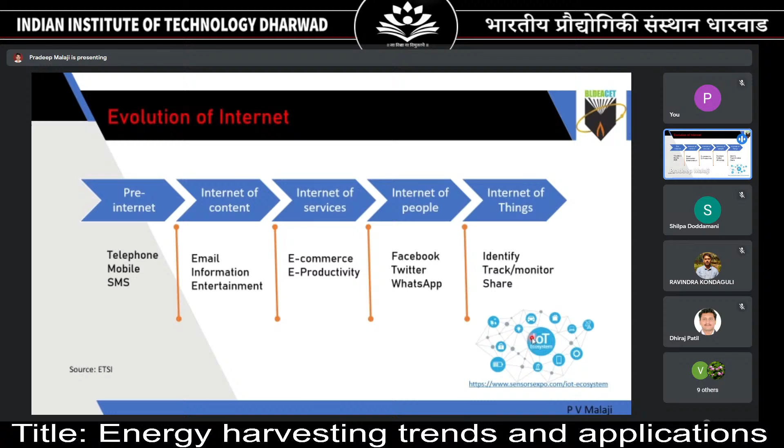What current technological demands are there? Along with Internet of Things, this has made possible smart cities. In smart cities, we want everything to be connected, everything to be controlled in real time, so all the data we want in real time and processing time can be reduced. We even want e-governance, smart energy, smart metering, smart transportation. All these can be made possible by use of Internet of Things.

How does Internet of Things basically work? We connect a lot of things around us using internet, and we can collect this physical world data, process it, then use present AI to take decisions and control the things.

But what is the problem that we are addressing now? We will be needing lakhs of sensors, and these lakhs of sensors need to be powered. With advent of technology, the size of the sensor has been reduced, but it is not so with the case of batteries.

Now we call these wireless sensor networks. They are self-organizing, pervasive, and small in size. The only thing left to be addressed is whether they are self-powered or not. The answer is yes, they are self-powered, but how? They are self-powered by means of battery, but that is not proving to be sustainable.

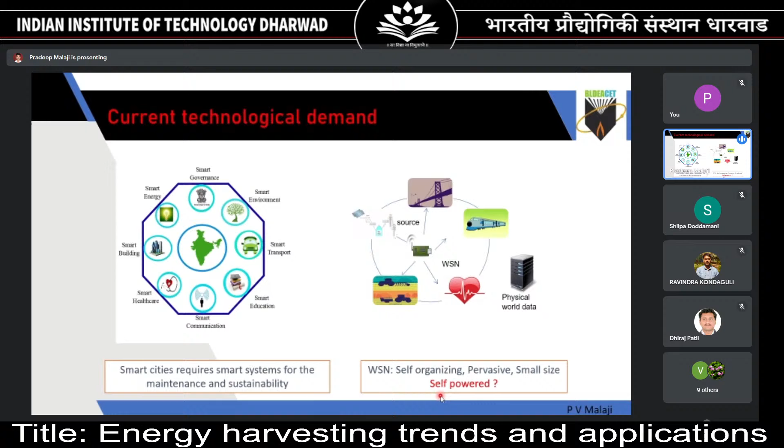So there are different things which need to be addressed, and we'll address one of the solutions. It may be possible in future that we can use, as an alternate to the battery, or to enhance the battery performance and life, this energy harvesting technology.

So this is how energy harvesting technology works. We have a lot of ambient sources surrounding us - it may be mechanical, thermal, solar, or radio frequency. These ambient sources can be converted into useful electrical energy via some generators. We'll be looking at these generators.

What are the different types of generators available? What are their advantages? How to overcome their limitations? Then comes energy storage, which is a major electrical challenge. We'll not be focusing on that, but it is a major challenge that should be integrated if you want to come out with a complete product.

Once stored, the energy can either be used for electronic devices or used to charge up the battery. It has a lot of applications. The output we'll discuss - what is the amount of output. Usually, the amount of output we can expect here is in terms of milliwatts, which has application in low power sensors. It has other advantages also, like health concerns.

Batteries are usually made up of lithium, and every 5 or 6 years we need to replace batteries, and that will produce a lot of e-waste. It can also reduce maintenance.

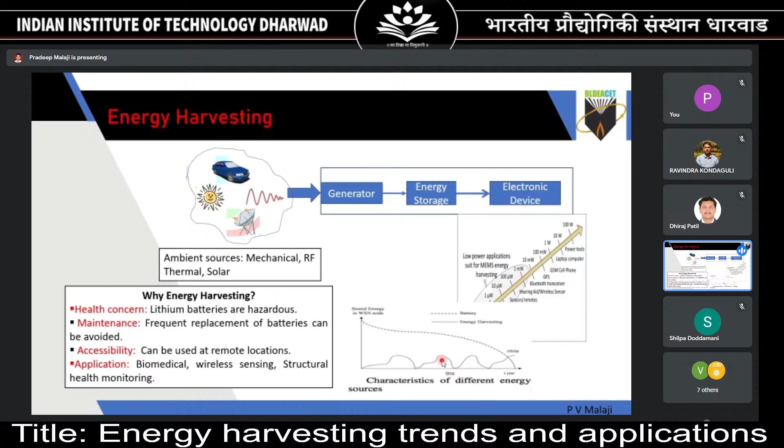I am talking about energy harvesting, but for most of us, energy harvesting is not a new thing. We know energy generation - thermal, hydropower, solar, all those things. But the taxonomy I'm talking about is the level of energy we are getting and where exactly the application is. We've already seen huge wind towers, hydraulic energy generation, or big solar panels producing energy there.

We can expect power in terms of mega scale, megawatts. Also we have seen generators, for compact usage, that has a scale in terms of watts. But at present we are focusing on micro scale power. So whatever in today's presentation, if I say energy, it will be from nanowatt to milliwatts, maximum milliwatts. This has made miniaturization possible, and this can be applicable for IoT.

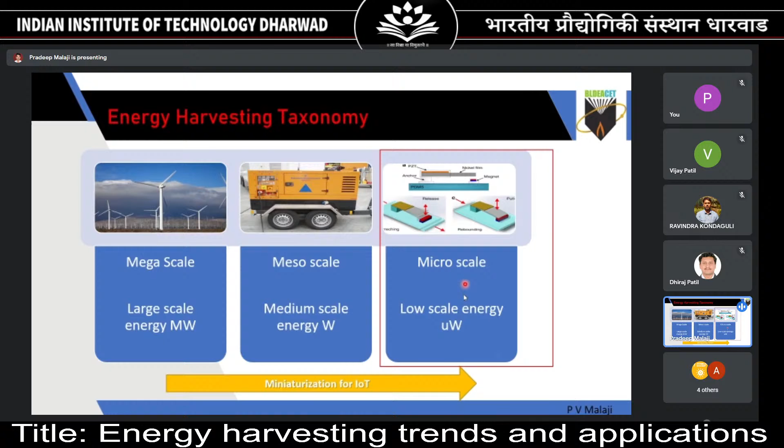What are the different ambient sources and different generations - how we can convert ambient energy into electrical energy? These are some of them, but we have many energy harvesting generators. The basic one we all know is Faraday's law - electromagnetic energy harvesting, which uses waste mechanical energy, or a generator which converts using the standard copper coil and magnet arrangement, due to the magnetic field. So we can harvest energy from mechanical vibration or mechanical motion and convert that into electrical energy, and store it.

The second one is piezoelectric energy harvesting. It is specifically a smart material - piezoelectric material is a smart material. Energy can be harvested because of the strain. We know piezoelectric material has a particular property: if you give mechanical input, it produces electrical output, and the reverse is also possible. We'll be using that reverse property, mechanical to electrical, and we can either store it or use it for microsensors or MEMS devices.

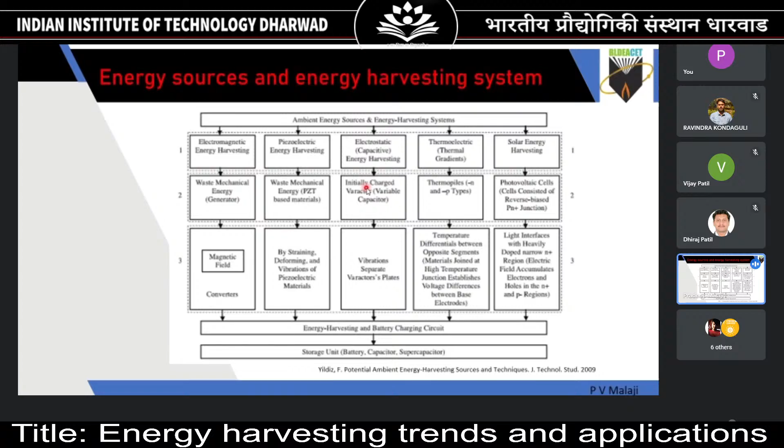Also we have electrostatic, where we'll be using change in capacitors - this also is one of the options. Next we have thermoelectric. From thermal, whenever we have a temperature difference between two nodes - in particular we have N type and P type thermopiles - because of temperature difference, voltage will be generated, so that can be used.

This has good applications in case of automotive exhaust and human body energy harvesting. Also we are using solar energy harvesting, but as I said, we'll be talking in terms of small scale, milliwatts. There are some PV cell technologies now - we are coming out with thin cells, which can be made as wearable solar energy harvesters. We can harvest energy with wearables.

So these are different generators from which we can convert ambient energy into electric energy. Apart from this, there are various things nowadays - triboelectric energy harvester is coming in handy for wearable sensors. There are a lot of things, but these are the major ones. We'll be discussing one or two of these things.

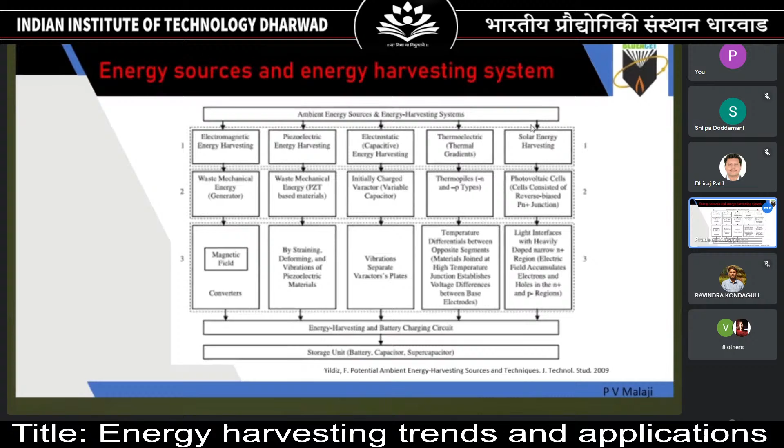Energy level, as we have seen, has different sources: vibration, thermal, and photovoltaic. We'll see how much energy we can expect from these sources, and then what are the challenges and how much is the efficiency of these generators.

If you go for photovoltaic or solar, we can harvest energy up to 10 milliwatt per centimeter square. From vibration, it is starting from 4 microwatt to 100 microwatt, or nowadays, with improved harvesters, we can reach up to milliwatt scale. From thermal, it is 1 to 10 milliwatt. Also from radio frequency, it is very low, but in some cases we use it where the only available source is radio frequency, in terms of microwatt or up to some microwatt level.

So we cannot say which one is good or which one is bad. It depends on where we are using it, what is the situation, and what type of ambient source is available with us.

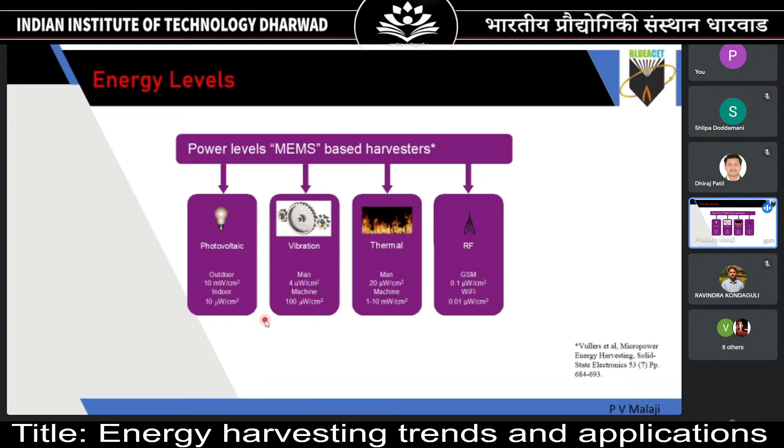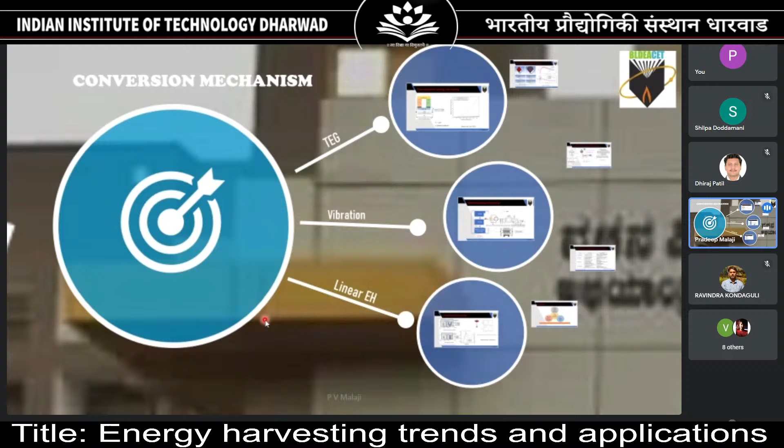Next we'll go to the mechanism - what are the different conversion mechanisms. Let us start with thermoelectric energy harvesting. We know when we have a PN junction with heat source and heat sink, there will be a temperature difference. We have all studied the Seebeck coefficient - more the temperature difference, more the potential difference. That potential difference can be used to supply some of the MEMS sensors.

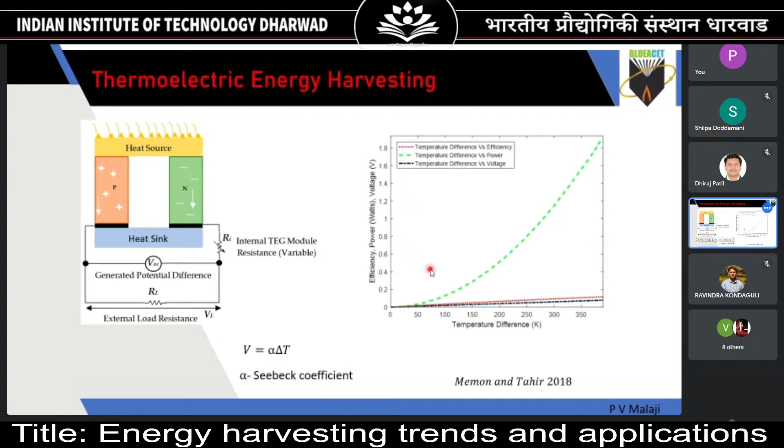In one of our recent works, we took a commercial TEG, thermoelectric generator. Usually the normal leg shape is rectangular or square, so we compared what happens if we use different shapes of these legs. That study was conducted and we recently published it in EPJST. We also tried changing the leg shapes, considering a single leg and how it changes the performance of the TEG. Usually square was the most optimal, but in some cases circular and rectangular were found to be better from the efficiency point of view.

At the commercial level, these TEGs are made up of bismuth telluride. It has some limitations - it cannot work beyond a temperature of 200 degrees Celsius, or up to a maximum of 300 degrees Celsius. If you want to go beyond this temperature, we need to use different specific materials.

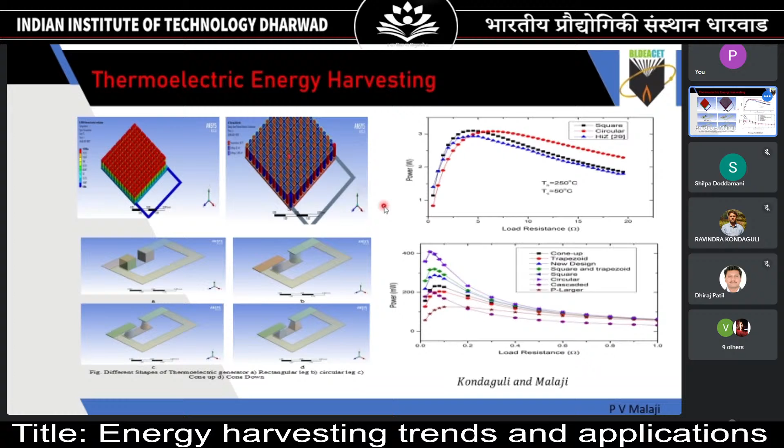Coming to vibration, we have seen these different vibration harvester generators and how they work. We have an ambient source as vibration, and from here we can harvest and convert the energy with these different generators. Then we can either store it or send it to the device.

So what is the challenge, what's most important here? Just talking from the mechanical side to get a glimpse of how it works - this is our harvester, whether thermal or vibration. Once harvested, it should go through a rectifier circuit to convert into DC, and these things are important: V in and V out. We want to maintain V out to be constant, so that our microcontroller and sensors are not affected due to fluctuation of voltage.

This charge management is very important nowadays, because most of the time, from the ambient source, we have an intermittent energy supply. To maintain that, we need good charge management. Neural networks, DNN, and AI come in handy for this charge management, so that we can overcome intermittent power problems. If we can maintain V out constant, then we are successful - we can successfully send that power to the microcontroller, through which we can power up the sensors, and then this data can be sent to the main workstation.

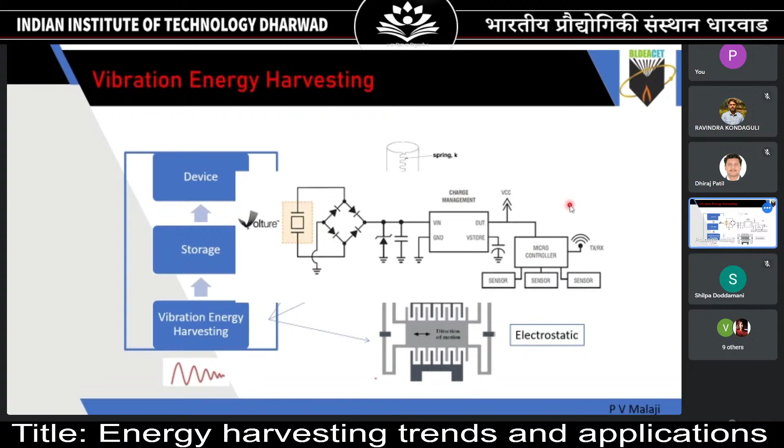So already we have seen how piezoelectric works, and most of the time we have come across these things: piezoelectric, electromagnetic, and variable capacitor or electrostatic harvester. Electromagnetic, we know this is standard due to Faraday's law. Whenever a magnet moves between a coil or copper coil, EMF is generated due to the relative motion. Based on that, energy can be harvested, and these are the basic electromechanical equations.

So we have mechanical as well as electrical system here. We'll always be facing these electromechanical equations whenever it comes to energy harvesting. We can say this is interdisciplinary work. Once you want to go for real-time application of this, you need basic electrical knowledge, and to some extent we need expert electrical domain knowledge. It's good for collaborative work.

So these are the equations. The first equation is the mechanical part. We know the inertial term, damping term, and stiffness term - this is the mechanical equation. The second equation has the coupling terms from electrical to mechanical, and this is our acceleration term due to base excitation, and these are the electrical terms. This omega c comes from the mechanical equation, so these two are coupled together.

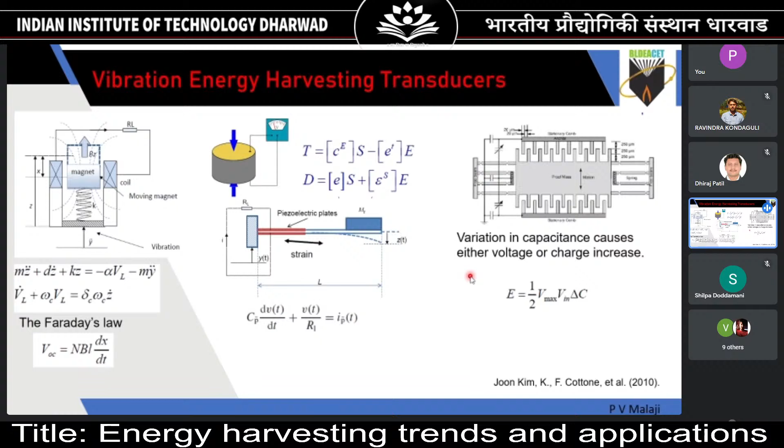So I have listed some of the advantages and disadvantages. It's taken from Wang et al. in 2007 - you can refer to these. As we discussed, we cannot say which is better and which is not. It again depends on where we are and how we can use it.

As we already know, electromagnetic and electrostatic are not smart, but piezoelectric is smart. So for miniaturization, like usually in case of MEMS, we prefer piezoelectric, whenever you have less space, because electromagnetic needs a lot of space. It is usually displacement based, but the only thing is it doesn't require any smart material. So from a cost point of view, electromagnetic is best, but if you go for space restrictions, then piezoelectric will be the better one.

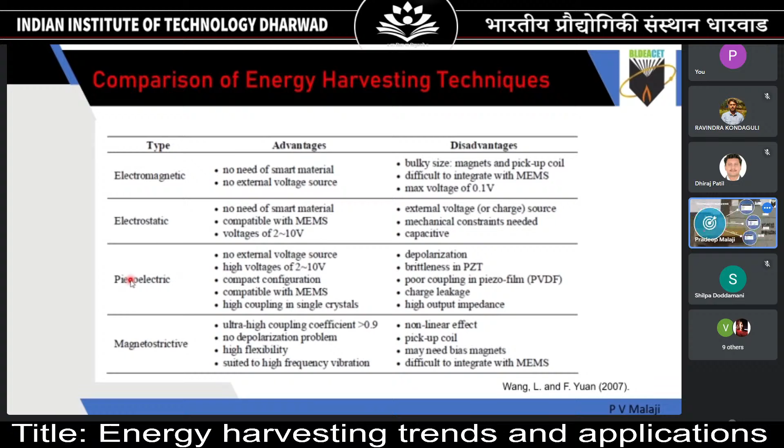Okay, this is a conventional harvester. Our first harvester, we can see it way back in 1996. So we had a first model of energy harvesting, where they used an electromagnetic energy harvester. They produced a small amount of energy, so we say it as a linear energy harvester.

So we all know how this linear vibration spring mass system works. You can see this small simulation - there is a forcing frequency as well as natural frequency of the system. So we know the resonance condition: whenever forcing frequency matches with the natural frequency of the system, we will get the highest amplitude. And we can expect the same from the energy curve also - we can expect maximum power only at the condition of resonance.

But apart from that, what happens? We can see a huge drop of the energy harvested. So that is one of the major limitations of this - it can harvest maximum power only at resonance. Apart from that, there is a huge drop. So there is a problem with the band - the frequency band is very limited. The problem or challenge is to increase this frequency band.

Whenever you design this harvester - say if this is a bridge, we take this as a bridge, source as a bridge, and we design a harvester for a particular frequency - if this bridge frequency and harvester frequency don't match, there is no resonance, and we cannot expect energy to be harvested from this device when connected to the bridge.

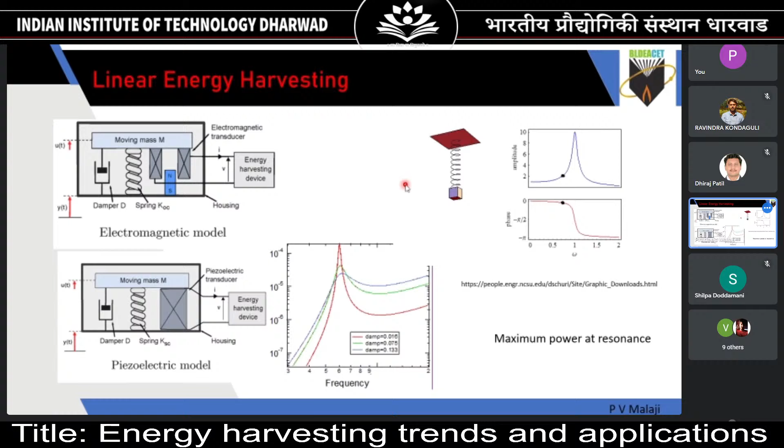So in order to overcome that, we need to go for the design of broadband energy harvesters. There are various methods through which we can harvest maximum energy at a broader frequency that you will see. So from our discussion, what challenges do we come out with?

So there are different challenges. One is conventional energy harvesters have single frequency power generation, and also there is absence of low frequency devices. Why do we want low frequency devices? Because we are majorly focusing on structural energy harvesting. Mechanical machines are high frequency machines, they vibrate at high frequency. But structures like buildings and bridges come under the category of low frequency, meaning less than 10 hertz. So we need to design harvesters which can operate at low frequency, and also which can operate beyond the resonance. This explains the absence of general application of this particular energy harvesting technology.

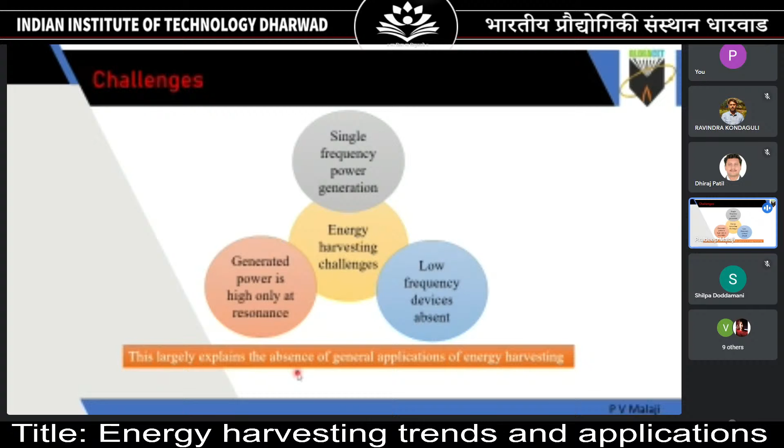Next, going on to band enhancement, that is one of the solutions needed from the existing solution. There are various ways through which we can enhance the band. One is by using multiple harvesters, or multi-mode. Multi-mode or array of harvesters. Second, we can go for non-linear harvesters - we'll see what exactly non-linear harvesters are and how they work. Third, we can go for advanced electronic networks. Today we'll limit our discussion to only the mechanical part, though the electrical part is very important too. We can use different circuits, like SSH circuits, to enhance the energy harvesting band. Tuning can also be done using electronic circuits.

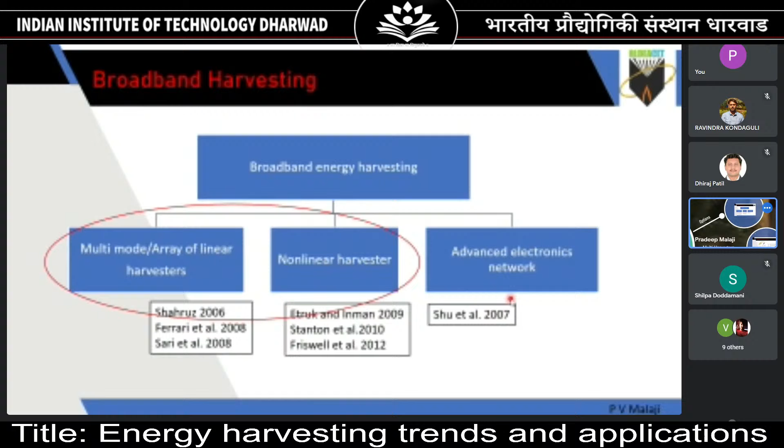Let us see one by one, starting with multiple or multi-mode harvesters. You have seen previously that a single harvester can harvest maximum power at resonance. What we can do is take multiple harvesters, but instead of similar harvesters, we introduce dissimilarities, or mistuning. So these harvesters have different lengths, giving them different natural frequencies - all of them have different natural frequencies, and resonance occurs at different frequencies. So from the first one we can harvest maximum power here, the second one here, and so on. With n harvesters, at different points we can harvest peak powers. In that way we cover the overall power output across a larger frequency band by using multiple harvesters with different dimensions.

There is one more possibility. Instead of changing length, we can also change the masses. We use n masses to generate enough inertia. We can change the masses at the end of the beams. This also results in the same outcome.

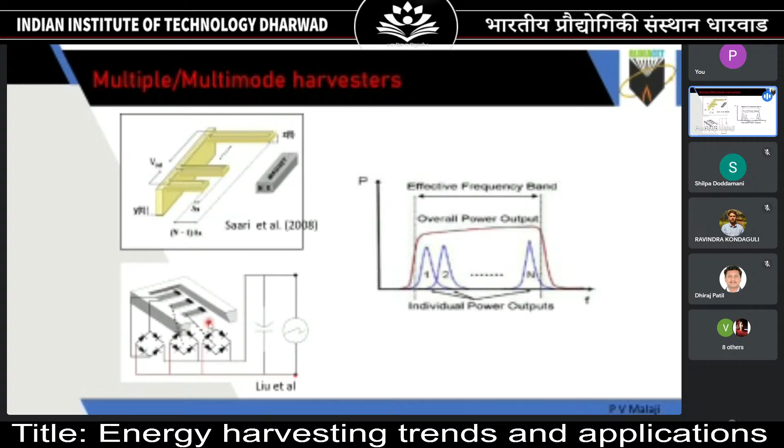So by this we can enhance the bandwidth of the harvester. But this also has a limitation, because if you want to go for multiple harvesters, you have to compromise with space. You are getting broadband energy, but the space limitation has to be looked into.

Now, if we consider multi-mode, it's not multiple harvesters, it is multi-mode. We know that any structure has multiple modes. Though the fundamental frequency, the first mode, is dominant, even the second and third modes can also be used to harvest energy. This is more clear from this point - you can see at the first frequency you can harvest maximum power, and at the second it's a little lesser, but with parametric adjustment we can bring these peaks closer together. But it's an intermittent band, not a continuous band - in between, we cannot harvest energy.

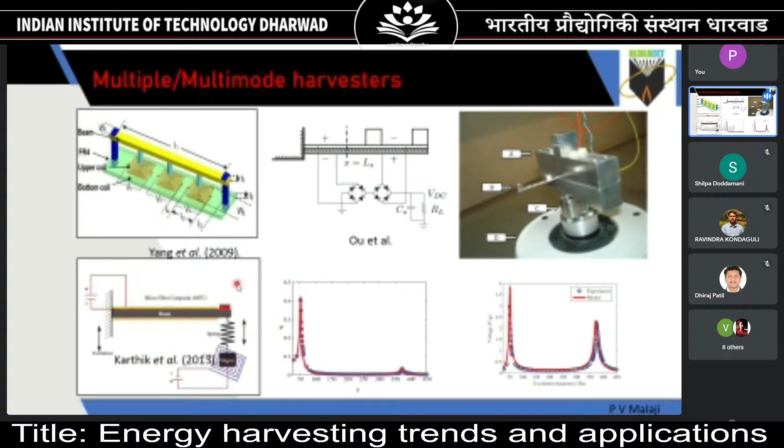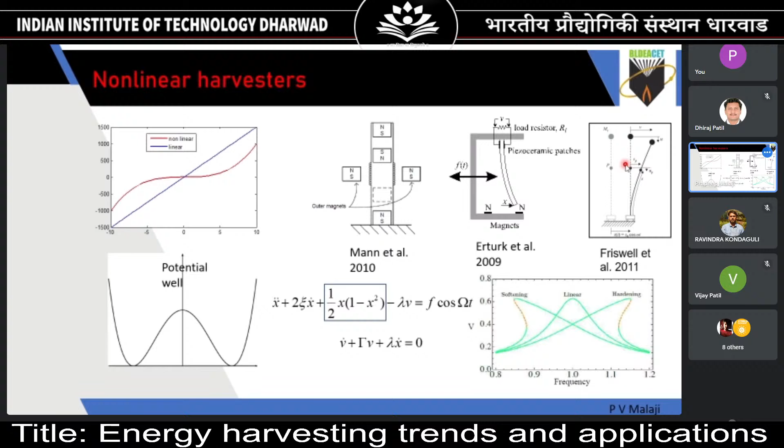For more clarity, this is what I was talking about, a Duffing oscillator. We did this in the IIT Madras Vibration Control and Energy Harvesting Lab. So a normal beam with a pair attached here and two base magnets. You can see this oscillating between these two magnets. We can say this is potential well number one, potential well number two. Either it can oscillate here only, or oscillate here, or change its stability point from here to here, oscillating between two stable points. This is a standard Duffing oscillator.

If you attach a piezo material here, you can harvest energy. This is one proposed by Inman, way back in 2009. So what happened here, we can see, from a voltage point of view.

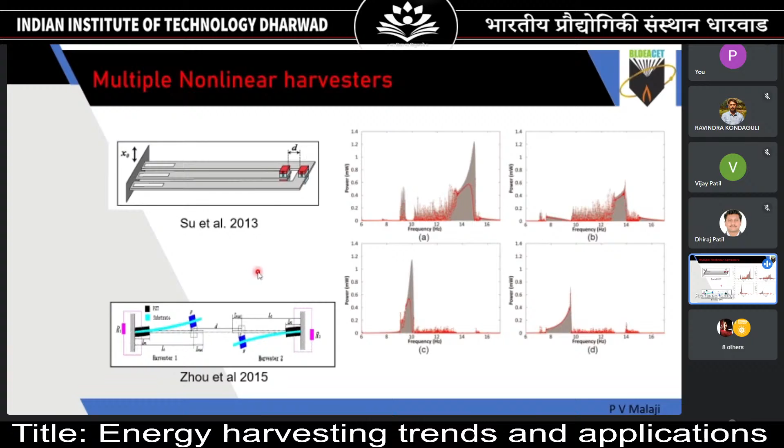Researchers then started thinking, if we are using a non-linear harvester, why not use multiple non-linear harvesters? Why only one? We can see there's a magnetic interaction between these, but three PZTs are used here, meaning three harvesters with non-linearity. They have seen a huge increment in bandwidth, and this is a kind of co-bistable harvester proposed by Zhou in 2015. Based on this, we proposed one more system which was published in 2017 in Applied Physics Letters.

We considered magnetic coupling, these two are the magnets, along with mechanical coupling. Previously we checked what happens if there is a mechanical or spring coupling, and now we thought, along with mechanical, if magnetic coupling is also present, what will happen? So this is the experimental arrangement. These are the coils, and this is the magnet at the end of the pendulum. These are pendulum systems, and these are the springs.

So this is MCH, capital MCH is magnetic coupling up-down, and IH is independent harvesters. Magnetically coupled harvesters have shown an increment of 150% in bandwidth compared to independent harvester, especially for pendulum number 2. Again, it depends on the mistuning. Pendulum number 2 is the low frequency harvester, and that's what gives it the advantage of coupling. Similarly here, we can see an increase in bandwidth.

At a power of 70 microwatts, you can see bandwidth enhancement. So this is for the independent, and this is for the coupled, magnetically coupled case, this for pendulum 2, this for pendulum 1. We can see pendulum 2 has better performance compared to pendulum 1. Pendulum 1, compared to a linear or uncoupled linear harvester, has reduced output—maximum power is less, and the bandwidth is also not much, almost the same. Whereas pendulum 2 shows an increment in both magnitude and bandwidth. This is because of energy transfer from pendulum 1 to pendulum 2, which is the low frequency harvester.

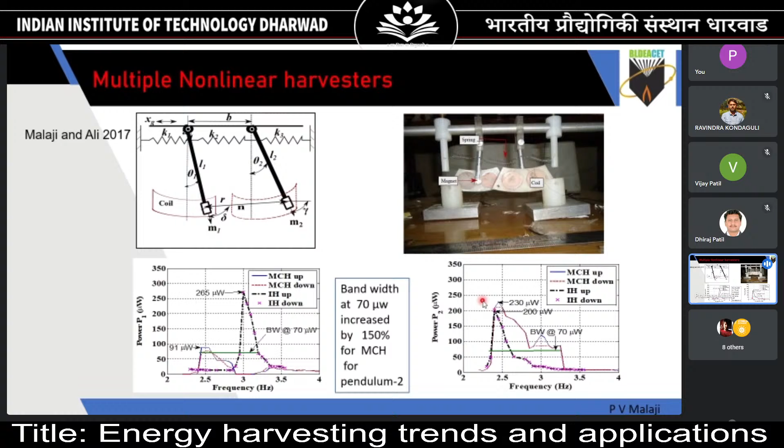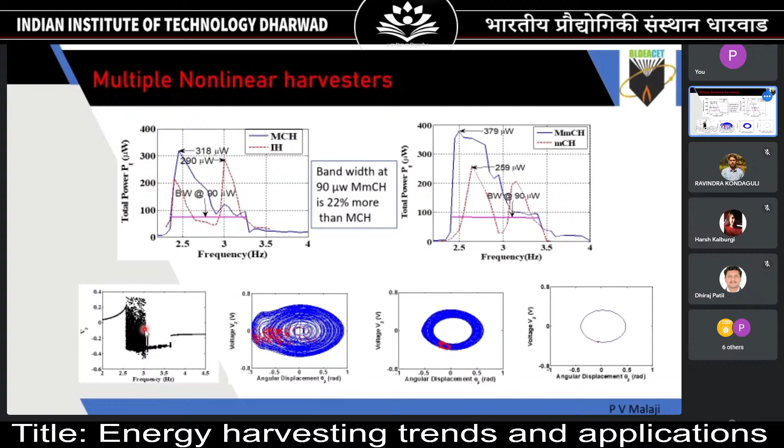Previously we talked about how one pendulum produces better power than the second pendulum. Then we started, in a recent paper in AIP Advances, work along with Glasgow University and Lublin University in Poland, which asked why harvest from both pendulums. In the case of pendulums or harvesters, there is a lot of investment—we need a lot of parts to harvest the energy—and if you're getting very low power from one of the pendulums, the power output is less compared to the investment. Then it's better to avoid that harvester.

Such that we can reduce the usage of materials, and in that order, reduce the cost of the harvester. Also, we can reduce the friction—if you're harvesting from both pendulums, there is an effect of friction due to the energy conversion. So that can be reduced, and we have even seen that this output is better than the existing one. It is almost equal to the total. So this will increase our performance.

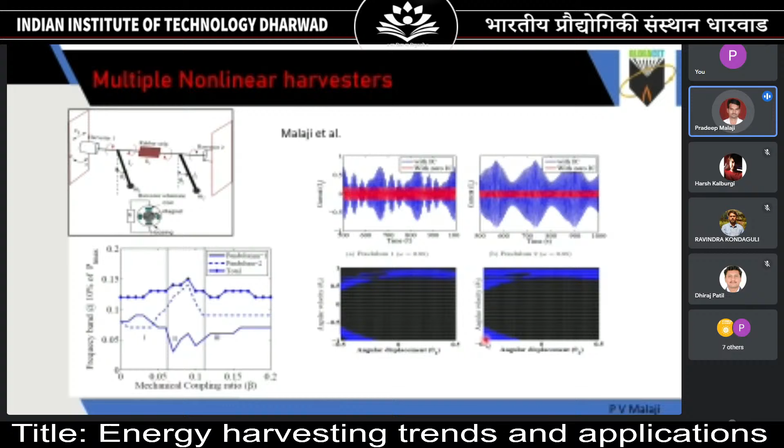With the introduction of initial conditions—introducing this initial condition is not that easy, you have to go for some control technique here, which can be discussed on another platform—but if you introduce the initial condition, enhancement in performance can be observed. These are the different basins of attraction, the zones of initial conditions, shown in blue, where you can expect better performance of the harvester. If you give this set of initial conditions, angular displacement and velocity, we can expect more power.

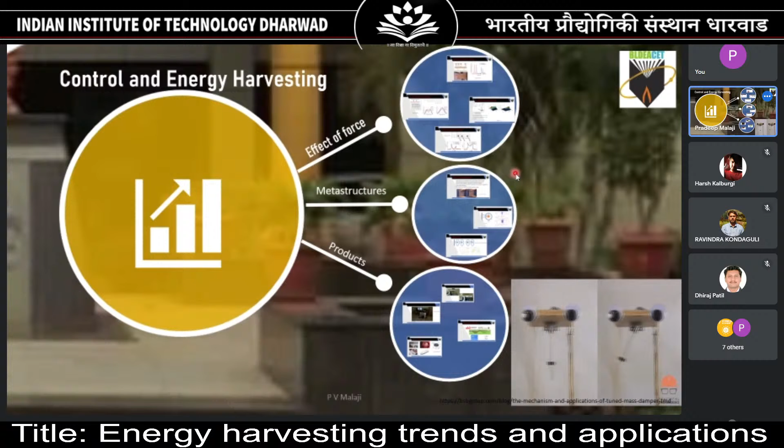So this is the work by Ali and others in 2012. This is the primary system and this is the secondary system. This secondary system is mainly designed to control the vibration of the primary system. Along with that, they try to harvest energy from the secondary system.

This energy can be used in rare cases, like when a structure is under earthquake. During an earthquake, we cannot expect conventional power to be there, so it's very difficult to collect the data of that earthquake. A secondary system can harvest energy from that earthquake vibration, and the data can be made available, like data of the structure during the earthquake. So they found that it not only harvests the power, it also controls the vibration of the primary system.

It can reduce by a measurable amount the vibration of the primary system. So this is the vibration of the primary system, and this is the normalized power energy harvested from the secondary system. So we can do both, but there is a catch here.

We need to optimize one against the other. If we want more energy to be harvested, we need more vibration of the secondary system, or in turn vibration of the primary system. So there should be an optimization between the amount of energy harvested and the amount of control of the primary system amplitude. Many people have worked on different algorithms to optimize these two, vibration as well as energy harvested.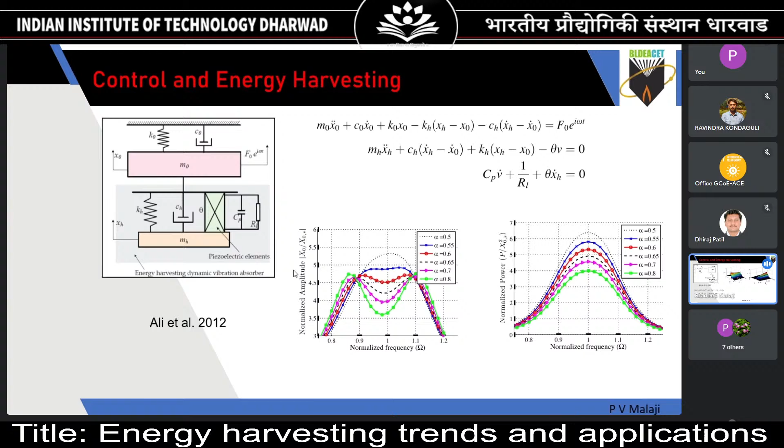We did similar work with a pendulum oscillator, and we found that a building structure can be controlled. We can have a compromise between energy harvesting and control of this primary system. From this energy harvesting, if we can change the coil properties, we can increase the damping of the primary system, and we can still reduce the amplitude of the primary system.

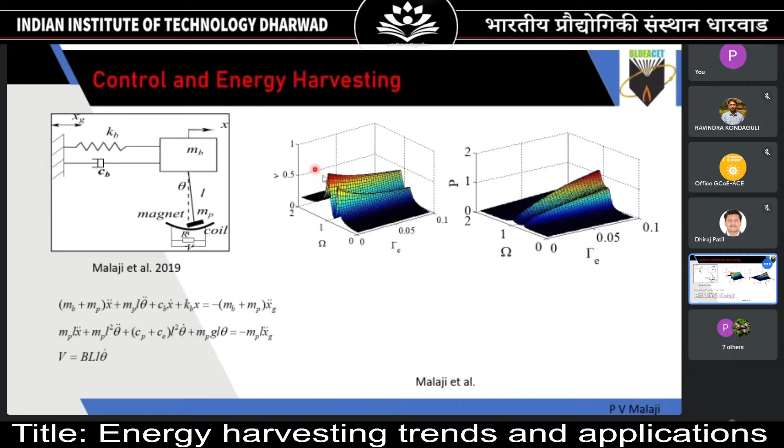We also tried a different system in 2019. This is work with University College Dublin. We tried to couple these secondary systems, and we observed it's not that much advantageous, but it still has some effect on the amplitude of the primary system and the band of harvesting.

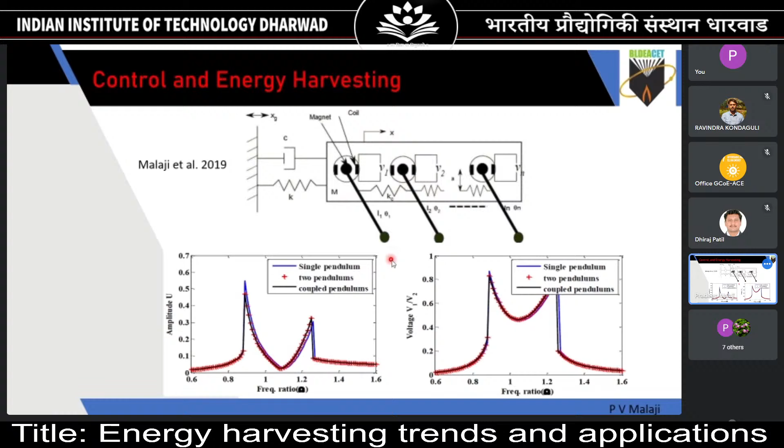Now the interesting thing, most of us have heard about something called metamaterials or metastructures. We can say these are unnatural materials. We already know what composite materials are, where we mix two different materials to make a material. We call them composite materials. But here it's not that, we are not mixing two different materials.

We are making use of the periodicity. We are engineering those materials to get unnatural properties from that material. Like we all know Poisson's ratio, or stiffness, we know only positive stiffness. Is it possible to get negative stiffness? The answer is yes, and that is only through metamaterials.

So we can obtain different geometric properties, only through a change in the geometry. We are not changing the composition, but just changing the geometry. A simple example: consider this plate with different holes, but the holes are not circular, they are elliptical. So it's only a simple change.

What changes is that the bigger hole has its major axis along the x horizontal direction, while the smaller hole has its major axis along the y axis. Usually, if you compress it in one direction, the second direction has to increase or decrease, but that effect can be reversed by aligning these holes in different directions. A simple example, nowadays we see some commercial ads like origami materials, or we've all played with papers.

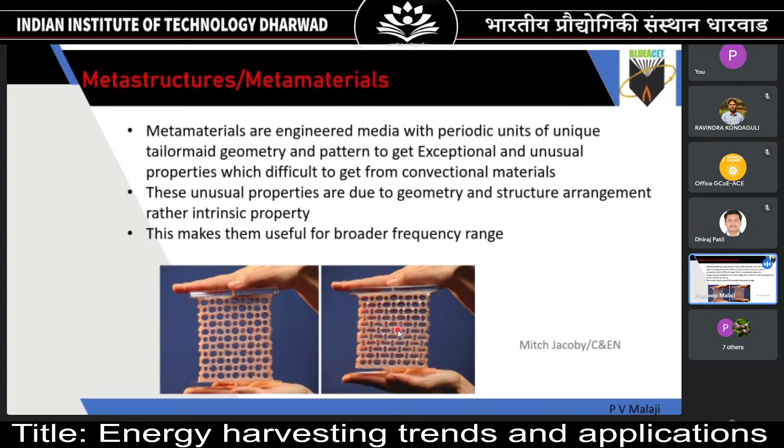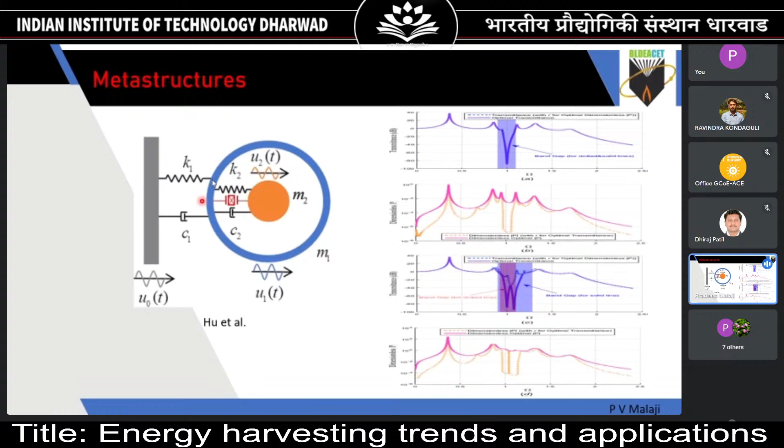This can also be used in energy harvesting. Instead of going for a single absorber, we can go for multiple mass-in-mass systems, or different inertial mass systems, inertial absorbers. So instead of having a single band, we can have multiple bands introduced along with these meta structures. Usually in vibration, meta structures are used for vibration mitigation, so along with mitigation, researchers have also explored the possibility of energy harvesting, and they have seen improvement in both mitigation and energy harvesting.

This is a recent paper in EPJ where we explored non-linear absorbers with metastructures. We have multiple absorbers here, 1, 2, 3 - we can have n number of absorbers, and the bigger mass is the primary mass. I think in the next slide we'll see how exactly it looks in the physical world.

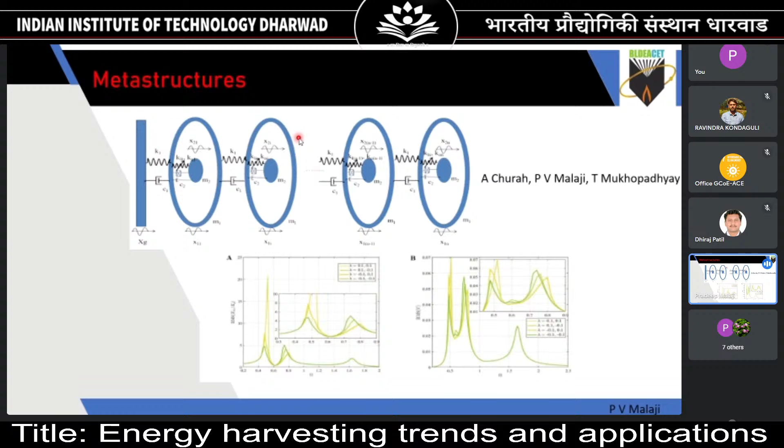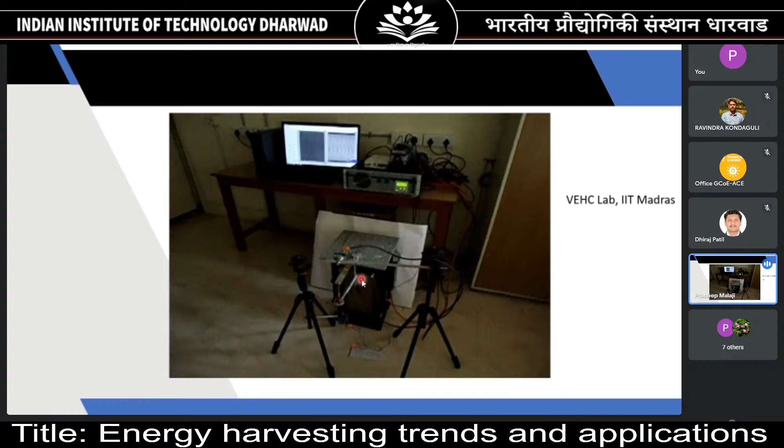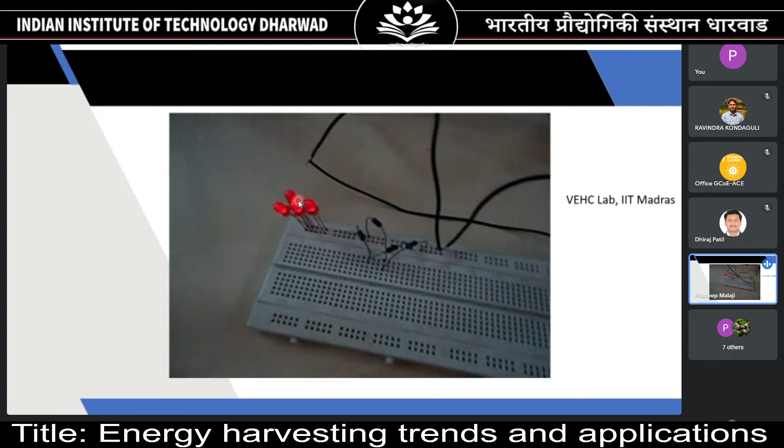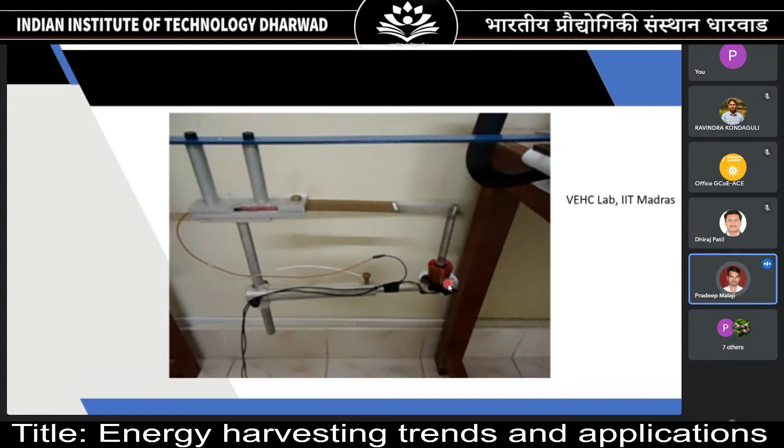In a real-time application, we made a simple bridge kind of system, and this bridge is subjected to vibration. That vibration is transmitted to the harvester system, and the energy is supplied to the sensor. We use a temperature sensor, a wireless sensor, and we are able to acquire data from that temperature sensor. This harvester was good enough to power up the temperature sensor.

We also checked this system in a moving bus. In the vehicle location also, it has harvested a good amount of energy, and that was supplied to the sensor.

I was talking about metamaterials or metastructures. So this is kind of a metastructure - we can see this is our primary system, and we introduced absorbers, multiple absorbers here with non-linearity. It can be linear or non-linear. This makes a metastructure.

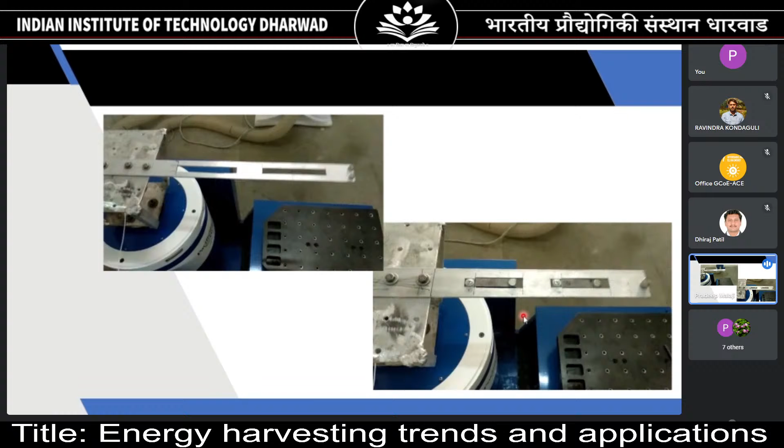You can see the difference between these two, with and without absorbers. You can see a lot of vibration of the primary system, whereas here that has been reduced to zero due to the introduction of this secondary system.

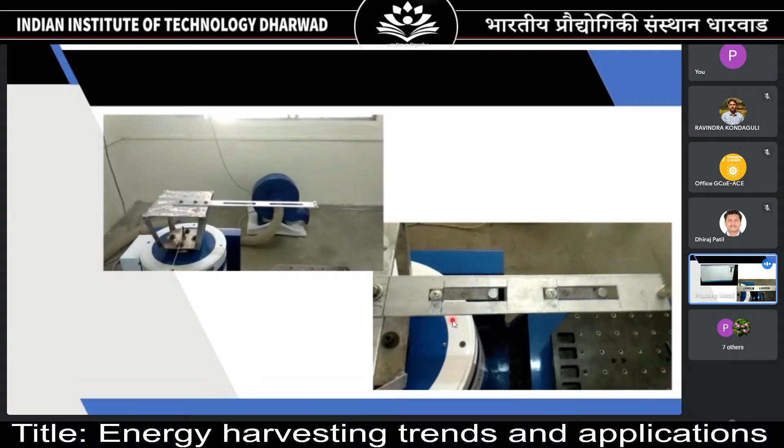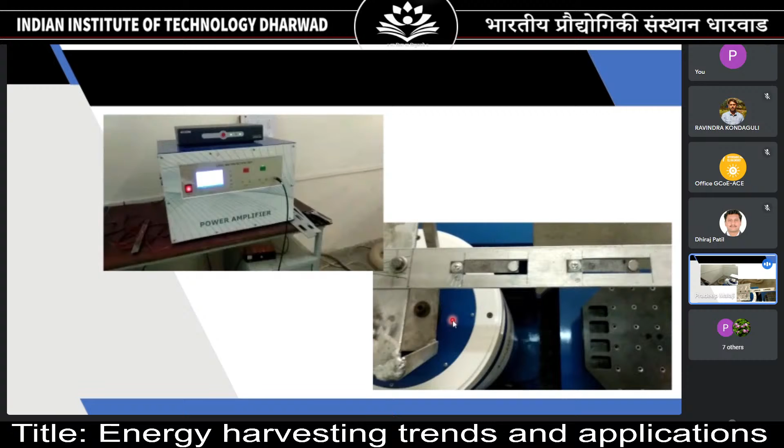Now coming to the market and products, there is a lot of market potential for this energy harvesting, not directly as an energy harvester, but along with the complete package. According to some survey in the US in 2017, they predicted a market size of $1.58 billion. Now they are predicting much more for 2025 - around $10 billion market feasibility for this energy harvesting.

There are different areas where it can be applied, like consumer electronics - you can see this kind of Philips remote. They came out with a completely battery-free remote, and it has application in healthcare.

This is from MIT - they successfully tested this energy harvester for a pacemaker. This is the heart of a pig that they tested on. From the heartbeats itself, they were able to harvest energy and supply that energy to the battery of the pacemaker.

So there is no need to change the battery of a pacemaker every 5 or 10 years. For some patients, if they cross the age of 60 or 65, doctors don't suggest surgery, so replacing the battery will be very difficult. This can be a one-time solution - just put the pacemaker along with the harvester, so battery life will be increased.

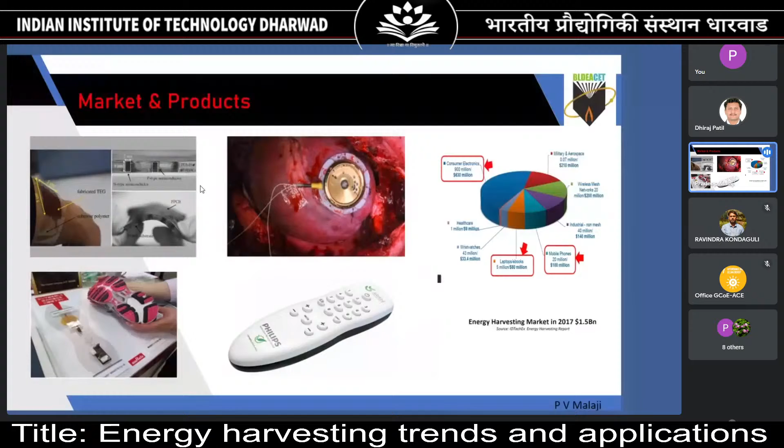Yeah, yeah, we can take another 5 minutes or so. Yeah, I think this is my last one, two more slides, okay.

And if you want different resources, we can visit these things: ES Dialogue in Poland, NIPS Laboratory in Italy, EPSRC network in Southampton University UK, Energy Harvesting Society of USA, and in India, IIT Madras, IIT Kanpur, IISc. So many people are working on this energy harvesting.

You can reach out and check these websites for more details. Coming to summary, we still have challenges. We have seen different ambient sources and how much power is available there, but how much we can harvest is given here. Hardly we are able to get 10% of the available power - efficiency is only 10 to 15%. That is a challenge. We need to design new harvesters and come up with new materials to increase this efficiency.

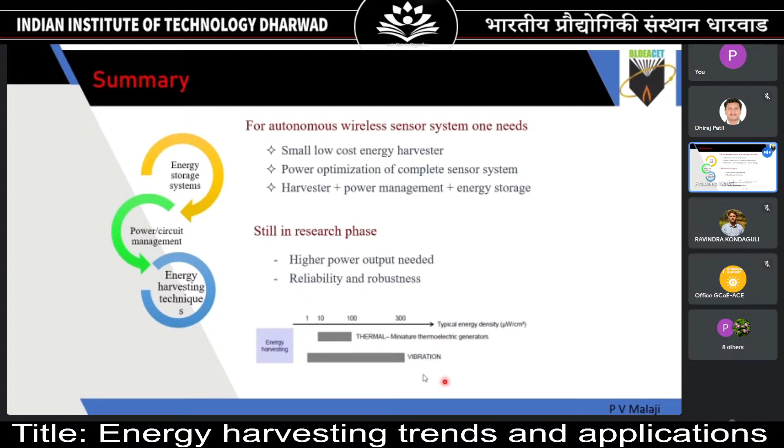These are the challenges we need to address: low cost energy harvesters, power optimization, and management of power and storage. These will make our life simpler and easier for IoT applications. There are different harvesters, like this comparison here between vibration and thermal. We can decide depending on the application whether to go for vibration or thermal. These are the challenges we need to meet.

So some of the references. I would like to thank my collaborators and sponsors. These are my students - I used some of their work during my presentation here.